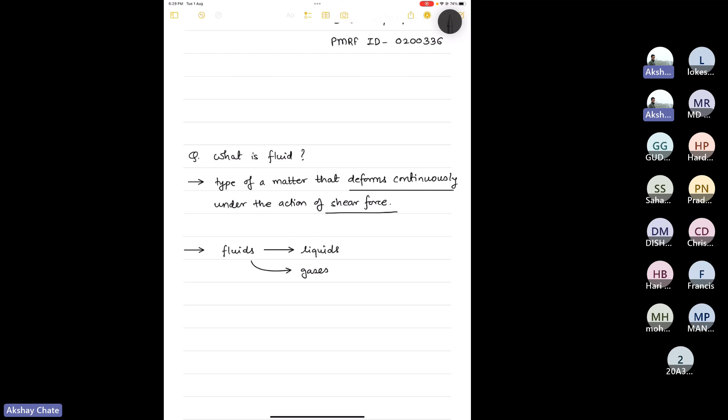So basic is like fluid and fluid mechanics is out of the way. Can you write down the definitions a little bit? It's written here, right - type of matter that deforms continuously. Okay, I can write it down, but it's not a textbook definition. It's okay, not a big deal.

What is fluid mechanics? Branch of science that deals primarily with deformation of fluids under the action of external forces and their consequences. So this is a condensed version of it, but this captures the essence of this course.

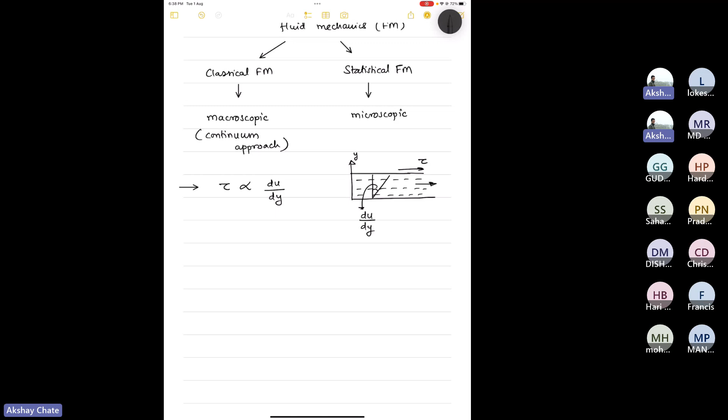I'm assuming you might have seen this pictorial representation of this law of viscosity. So basically, fluid is flowing in this direction, and this is our y direction. As it is a shear force, it will be applied on the surface or the interface that will deform the fluid, and so this angle essentially is the rate of deformation of fluid, and then there is a constant of proportionality, which is nothing but the viscosity.

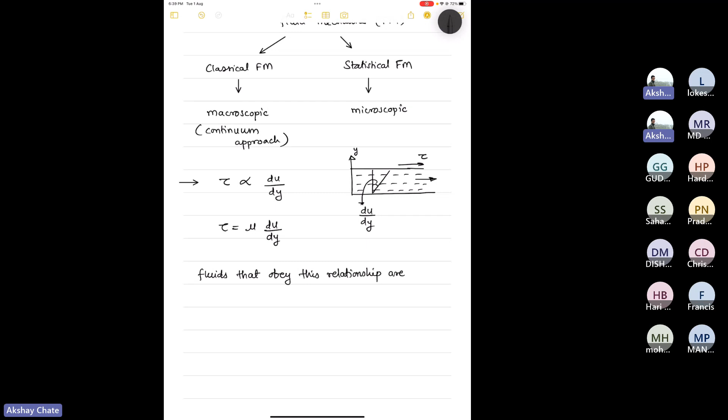And this is true for, like, there are some fluids which obey this law, and there are some fluids which don't obey this law. So the fluids that obey this law are called Newtonian fluids.

Okay, so then as the name suggests, if some fluids are Newtonian fluids, then there will be some fluids which...

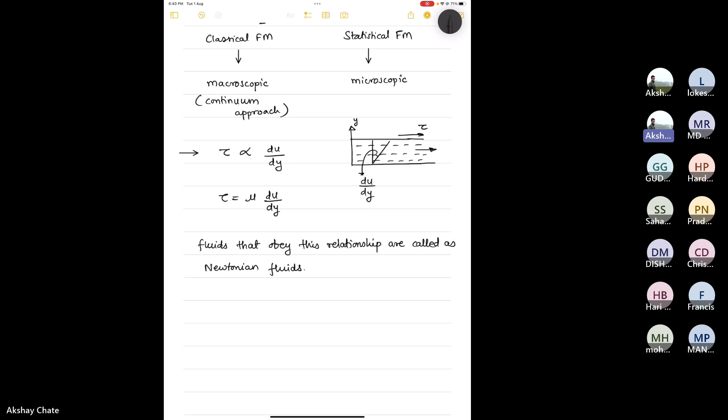You are not audible, sir. Am I audible now? Yes, sir. Oh, I don't know what happened. I was audible, I think, initially. Anyway, so yeah.

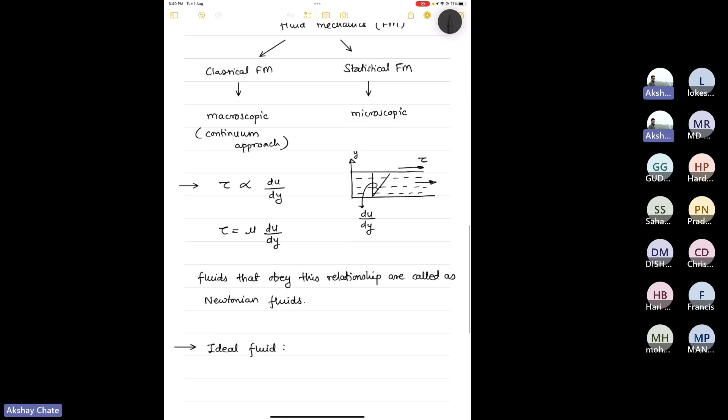Then there is something called ideal fluid, which does not exist in reality, but it is an idealization of a fluid in some hypothetical context. You should only remember two things about ideal fluid. It has zero viscosity, and I think that is the most important thing of it. And I think it is incompressible. It is considered incompressible as well. But this is not a real fluid. So as long as you just remember the concept that there is something called ideal fluid which has zero viscosity, it's fine. I think that is okay.

And then there is another type of... one second. Sorry.

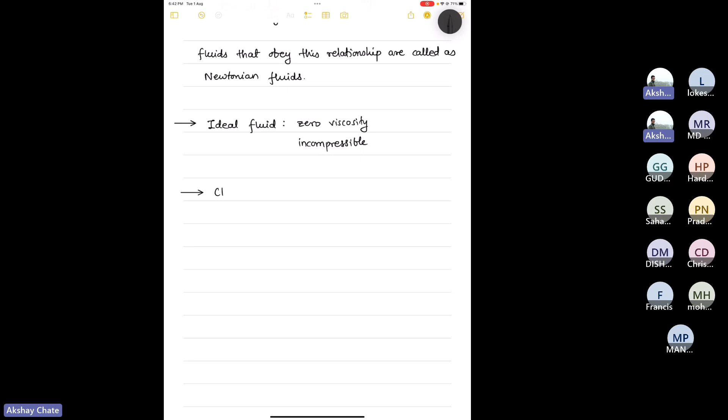But sir, we learned any fluid has viscosity. We learned that somebody told us. Yeah, any real fluid has viscosity, however low it can be. But this ideal fluid does not exist in practice, in reality. So I am telling you this because you might see it as an option in some of your questions or in some competitive exams. Ideal gas, typically we discuss that in thermodynamics. So in reality, nothing is ideal. So in context of fluid mechanics, you can define ideal fluid which will have zero viscosity and it will be incompressible. I think there are some additional properties to it, but it does not exist in real life, and therefore we don't study it in this course also, but it is there. I am just introducing the terminology. It's not a real thing, so don't get carried away too much on this. In real fluids there will be some viscosity and there will be some additional change in behavior also, which we'll discuss now. So I will just call this classification of fluids.

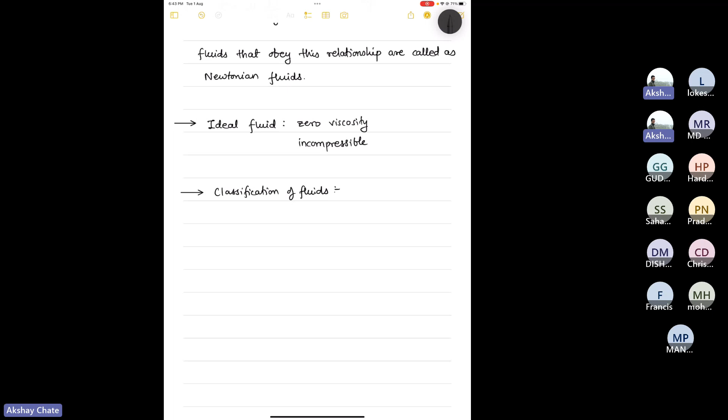And there is one very famous diagram. One second, I'll just pull it up.

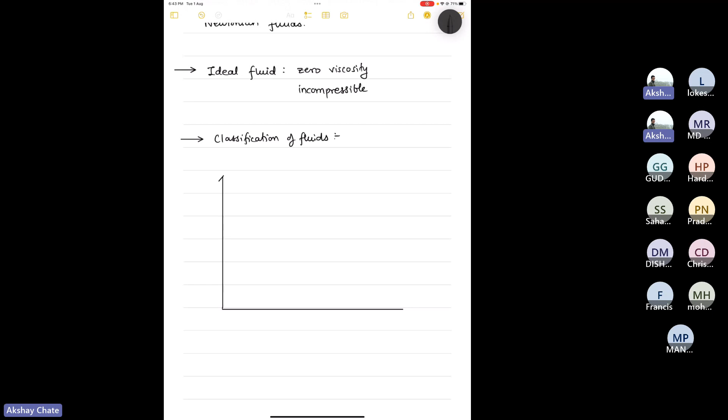So on the y-axis you have shear stress, and on the x-axis you have this velocity gradient or rate of deformation of the fluid. Newtonian fluid is typically a fluid which shows... okay one second. So this is the origin. So this is Newtonian fluid.

Because here your tau is directly proportional to the gradient, you get a straight line. It will have some slope, which is your viscosity.

Then there are some fluids which don't show this type of behavior. They show slightly different variation, like this curved line. You will not get a linear relation, but something like this. Here your shear stress is increasing with respect to the du/dy velocity gradient, but it's not a linear relationship. Initially the deformation is more - you apply a small load and it deforms, but after a certain time, if you want to deform it further, you need to apply more load. So that is the relationship between tau and du/dy. These type of fluids are called dilatant.

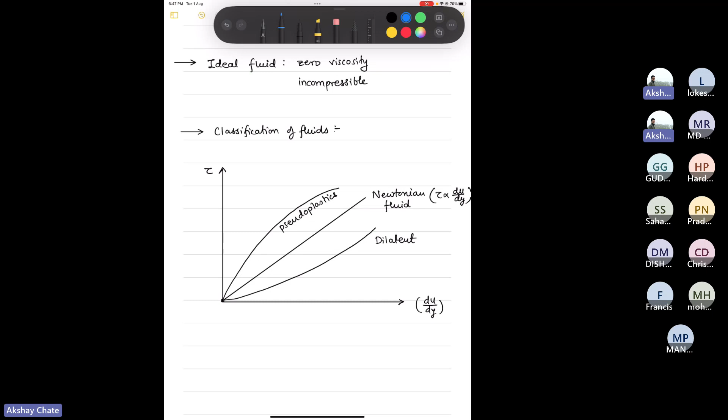Then there is another type of fluid called like plastics. As soon as you apply the force, they won't deform. For some time they behave like a solid, with no deformation under shear stress. But after a certain time, they start deforming, and that is how you get the rate of deformation. So they will typically look like this. There is some initial tau 0 that you need to apply, and only after that will you see some deformation that is visible.

So when they show this linear variation after that initial tau 0, they are called Bingham plastic. I will write it here.

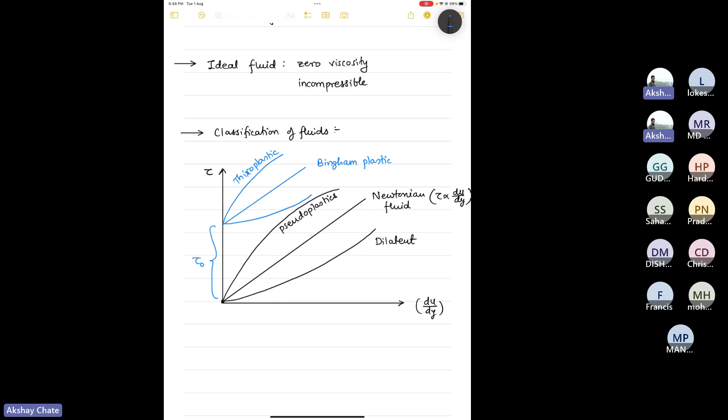And then there are also some fluids which, after initial application of tau 0, when they start to deform, don't deform linearly. They deform something like this as well as something like this. So as in the case of Newtonian, pseudoplastic, dilatant, there are 3 types also with Bingham plastic. The other 2 types are called thixoplastic, and I think this is rheopectic or rheoplastic, something like that. You can cross reference the names that I'm putting here, but you get the idea, right?

It's not like every fluid, as soon as you apply the shear force, starts deforming. It doesn't work that way.

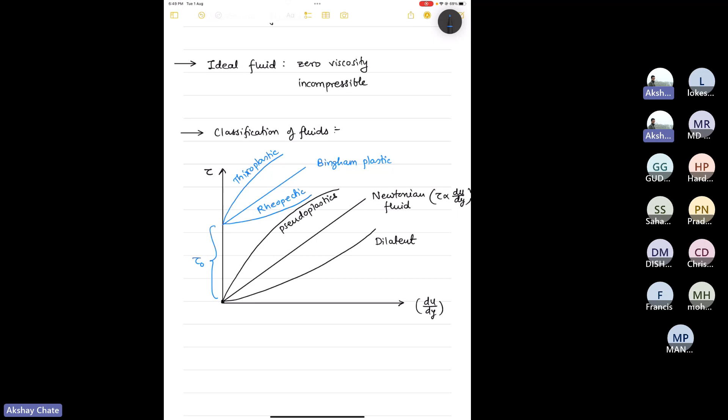And this velocity gradient is called strain rate also. So keep in mind this velocity gradient... oh this is not right, sorry. Yeah, this is thixotropic, and this is rheopectic, okay.

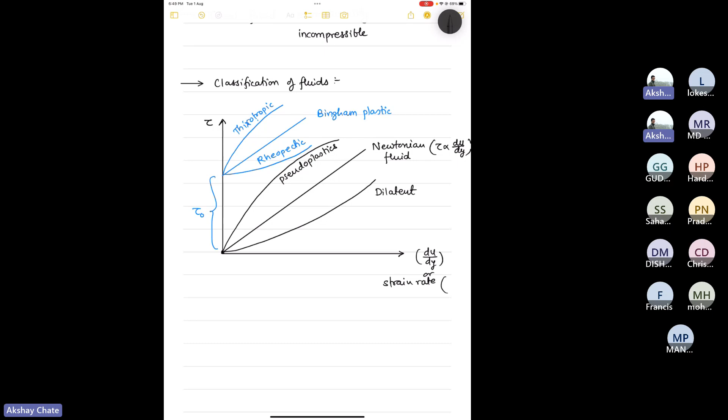Just to clarify, sometimes on the x-axis, instead of du/dy, you may get strain rate. In some books you may see this. So basically, strain rate is this deformation with respect to time. If you do some geometrical manipulation in this figure, you get that the velocity gradient is equal to the strain rate.

So that is there. Coming back to this diagram, I have one question. This is called tau 0, the yield shear stress. You may not need to remember this or mug up these things, but you should at least have some feeling as to what we are talking about.

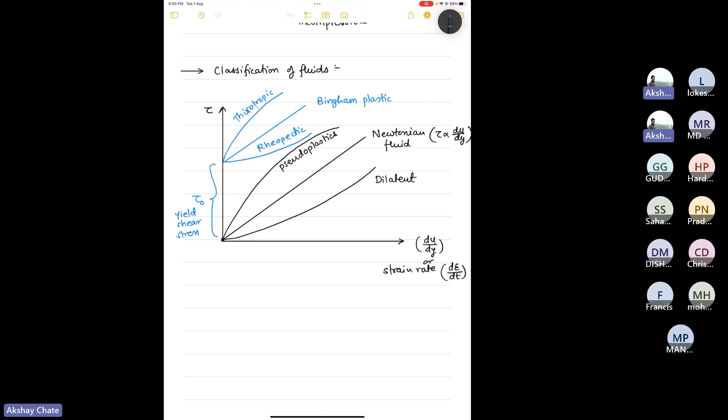So my question to you is, as I said, there is something called a hypothetical fluid called ideal fluid, and then there are some solids. So on this figure, where we have tau on y-axis and velocity gradient or strain rate on x-axis, where will the ideal fluid lie? Or if I want to show the ideal fluid line, where will it be? Can anybody answer this question? First of all, did you understand the question?

So it does not lie anywhere. Okay, so somebody said it does not. Pradeep, I think. Yeah, Pradeep said it does not lie anywhere. Anybody else? Can you repeat the question?

Okay, so here you see 6 types of fluids: Newtonian, dilatant, Bingham plastic, etc. My question to you is, if I want to show an ideal fluid on this plot, what will be the relationship between tau versus du by dy for an ideal fluid? Keep in mind, ideal fluid does not have any viscosity. It is a hypothetical fluid with zero viscosity.

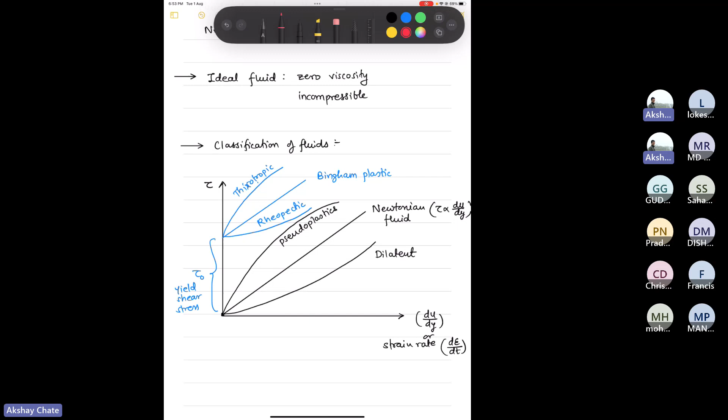Yeah, so you are going in the right direction, but see, if any fluid does not have any viscosity, even if I apply very small shear stress, it will keep on deforming, right? Because there is literally no viscosity. So therefore, in a limiting sense, it will have infinite strain rate or velocity gradient with very small tau. So that line should be something like a horizontal line, close to origin, but there should be some non-zero tau, right?

Like that, you can apply any tau to the ideal fluid, it will keep on deforming because it does not have viscosity. So the deformation is literally independent of whatever tau you apply, but typically for very small tau, it will start deforming very high. So that is ideal fluid.

These type of MCQs are generally asked in some competitive exams, maybe in GATE exams or something like that. But yeah, so the next important part of this discussion is examples of these type of fluids.

In this course, one question - when you say ideal fluid is incompressible, means it cannot be compressed, does that mean it cannot be deformed? No. Incompressibility comes in the context of normal force. In the case of shear force, it doesn't matter whether it's compressible or not, it will deform. When you say it is incompressible, that means when you apply normal force to it, it won't budge.

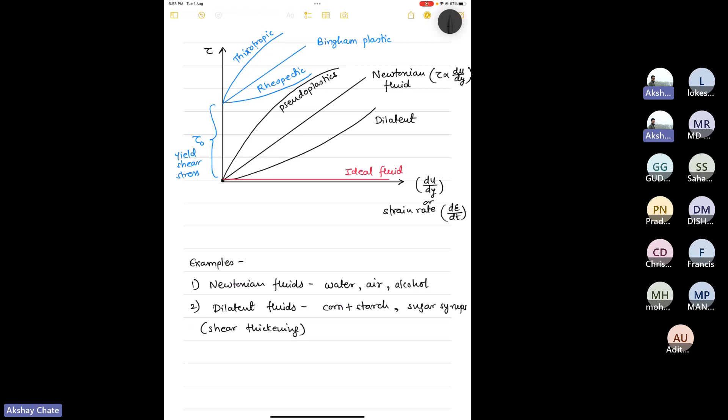Then there is Newtonian, dilatant, then pseudoplastic. These dilatants are also called shear thickening - this is just a term you should be aware of. What happens is, as the diagram suggests, when you apply more and more shear force, the velocity gradient or strain rate becomes less and less. So basically it is said that it thickens with application of more stress.

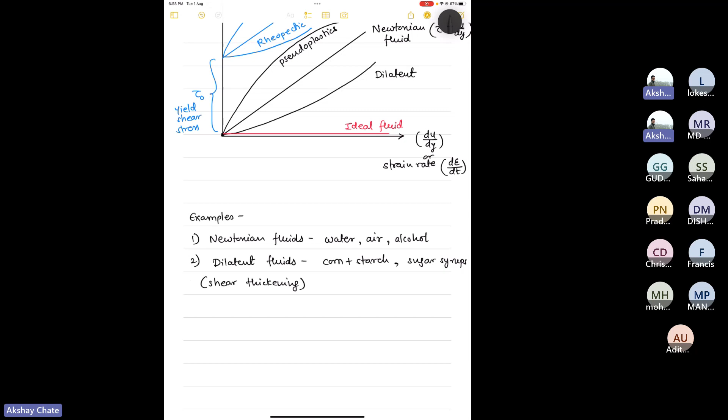So therefore they are called shear thickening fluids, and the pseudoplastics are called shear thinning. Basically, with the application of more and more shear force, they keep on becoming easier to flow - their resistance to flow, which is viscosity or the velocity gradient, decreases.

So like that. Don't get confused, or if you are not interested, don't pay too much attention to this topic. But my point is, these terms you should at least be aware of, if you're going to say you study fluid mechanics.

The most important example is blood. You might have heard that when you do a blood test they use this thing, but not directly, so leave that aside. Blood is there, and I think paint also comes in this, nail polish paint.

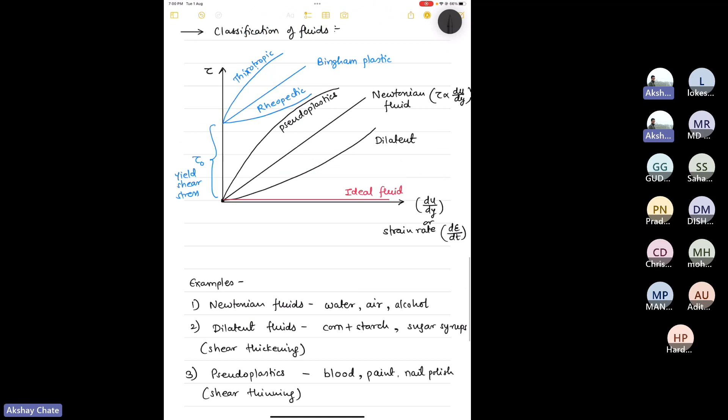So Bingham plastic etc., we can discuss. I think Bingham plastic is toothpaste. As far as I remember, the most important Bingham plastic example is toothpaste, and I think it was asked in the GATE exam also.

Yeah, toothpaste and mayo, that mayo sauce that we eat. And what else is remaining? Rheopectic. These are very special types of fluids, not easily observed. I'm just giving you some examples, but they're not that important, I think. This rheopectic, I'm not finding an example either.

Yeah, so there is one example for rheopectic, which is, I think, gypsum suspension in water, something like that. Initially it won't budge, but after a point it will start deforming, and then it will become harder and harder with the application of more shear stress.

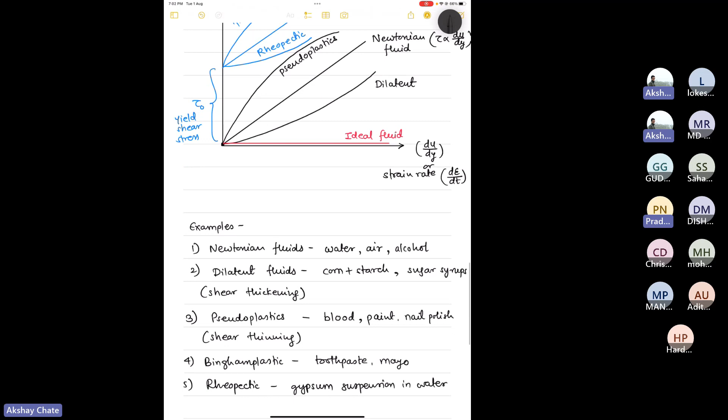And for thixotropic, I think the important one is lipstick, something like that is important for it, because these type of very small questions will be asked in your competitive exams. In this course, maybe not much, but you should at least know what is what. So thixotropic, I am not even finding good examples for it.

Anyway, rubber, sir, rubber. Rubber, huh? Are you sure? Yeah, rubber. Okay, yeah, we'll put it.

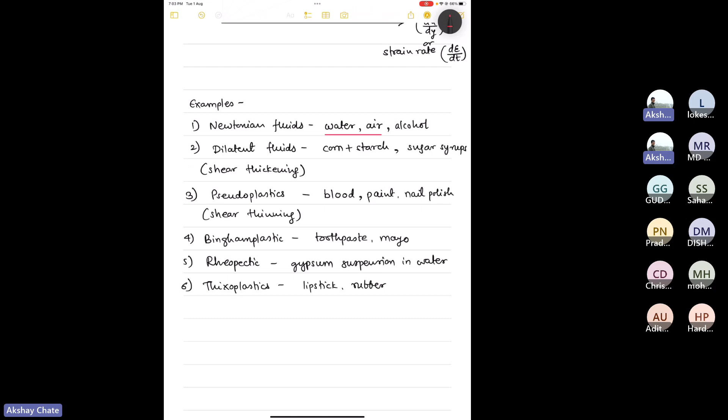So it is my sincere request to all of you attending this lecture: I have given these examples, and there will be some more examples, so if you're interested, please cross-check this. The key takeaway from all this discussion is that the most important fluids we are going to study are water and air, and they are Newtonian fluids. Therefore, for Newtonian fluids, we typically use this relation to solve problems later on. This is the whole conclusion. We've spent some 5-10 minutes on it, but it's good that you know other things also.

Let me check this. I think in your assignment there are some questions on this topic, and I think you can answer this. This ideal fluid is in your assignment question, so maybe you can answer it. I think I have given you the answer directly, but anyway.

One second. Now next, what should we discuss? This is actually an introductory class, right? So I think surface tension, capillary, and what else is there, I think those should also be covered in this one. Let me just confirm this.

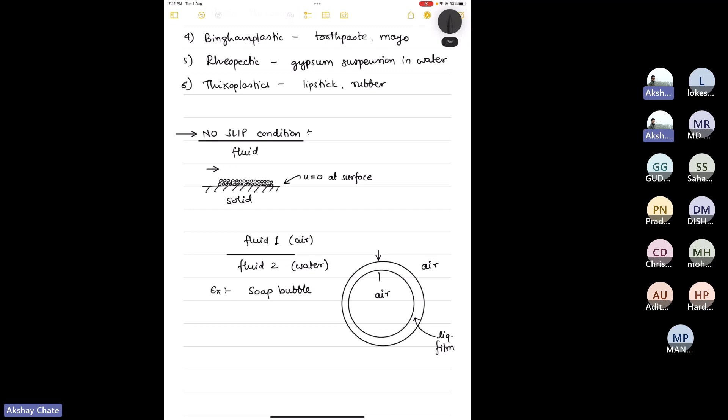So here, what happens? In solids, solids have stronger intermolecular attraction forces, therefore they don't deform easily when fluid flows on top of them, and the first layer of fluid sticks to it. But in case where there are fluids on both sides, both fluids will deform, right? So on this outer interface as well as on this inner interface, you cannot apply the no-slip boundary condition.

And then there is something called the slip boundary condition. There, basically, you don't take velocity as zero at that interface. And there is one more example where no-slip boundary condition doesn't apply.

It is, as I said earlier, in microfluidics. Channels there fall under the continuum or classical fluid mechanics domain only, but they are very small. Let's say a normal pipe is of the order of centimeters, millimeters, right? But if I construct an artery wall for a human heart, it will be of the order of a few hundred microns or something like that.

So that still falls under the category of classical fluid mechanics, but the length scales are very small. So sometimes the no-slip boundary condition does not apply because there are other forces at that very small diameter or length scale that become dominant over the intermolecular forces. So there also the no-slip boundary condition is not strictly followed. If some of you are interested in higher studies, keep in mind that this also happens.

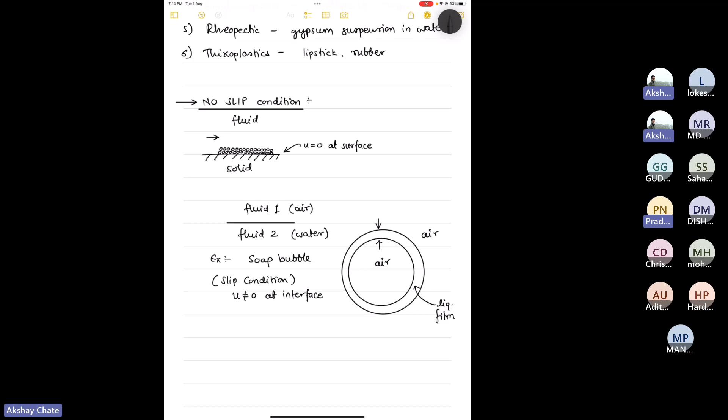Then, what else is there? In case of turbulent flow, also no-slip boundary condition issues occur. Turbulent flow, yes, very good question. So if you see turbulent flow...

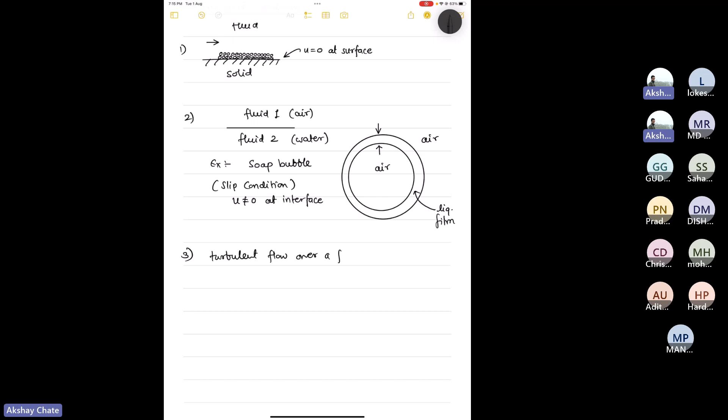Maybe I'll draw it here only. So this was the first case, this was the second case. Let's take the turbulent flow as the third case, we'll consider turbulent flow over a flat surface, just for our understanding. So what happens if you zoom in, let's say this is the solid surface at the bottom.

If you just observe it, in turbulent flow, the velocity vectors of fluid particles keep changing as per their location as well as their time. So there will be some eddy or vortices also. Turbulent flow is a very difficult fluid phenomena to study analytically using equations and all.

It's very difficult. But if you zoom in on this interface, what is observed is, I'll use a different color. Very close to the surface, there is a very small layer which is called as viscous sublayer.

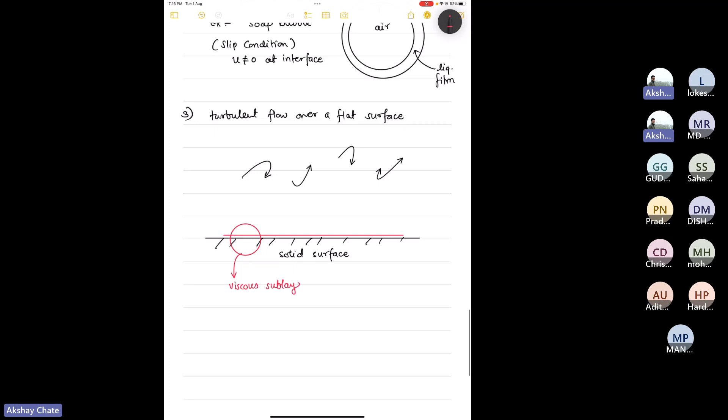If you zoom in, this is again the interface, solid interface. But in this region, there is similar behavior as the laminar flow. So there will be orderly motion between the fluid particles, and the first layer of fluid particles will stick to the surface, and then typically what is the laminar flow, orderly fashion flow will take place.

So even in case of turbulent flow, no slip boundary condition is applicable. The difference between laminar flow and turbulent flow comes after this viscous sublayer. So basically, very close to the surface, there will be viscous sublayer. Then there will be something called as buffer layer. And then there will be your turbulent flow.

So there is a dedicated field of fluid mechanics which deals with turbulent flow and how they develop. And as you asked, that is a very good question. In case of turbulent flows also, this no slip boundary condition is valid.

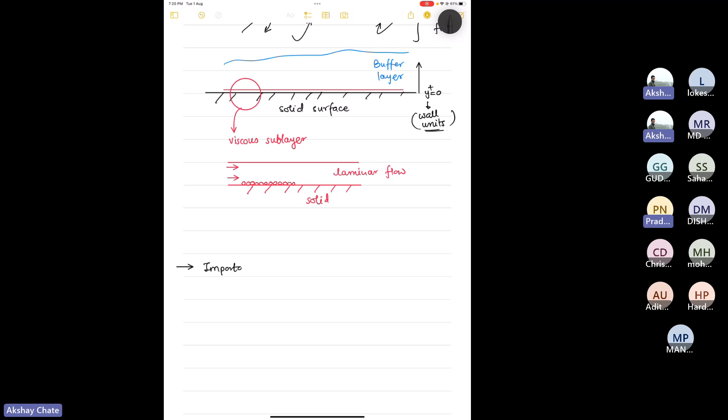There are some important numbers that we need to understand. First is called as the famous Rayleigh number.

So, can anybody tell me the formula for Rayleigh number? Anyone? First of all, have you heard this Rayleigh number exists? Yes, I did. Really, okay good. Then can anybody tell me how do you define Rayleigh? Or is it not covered yet? I think maybe it's not covered yet, but just let me check the notes if it is there or not. If not, I'll just leave this topic to discuss in the future. Okay, I think it is not discussed, so let's skip it for now. Maybe next time we'll come back to it. You can just tell us, just 1 or 2 sentences. Pardon? You can just tell something. Since you mentioned this, kindly 1 or 2 sentences, you can just mention what is this actually. Okay, yeah, I'll let you know. See, what happens? How should I say this thing. Let's say.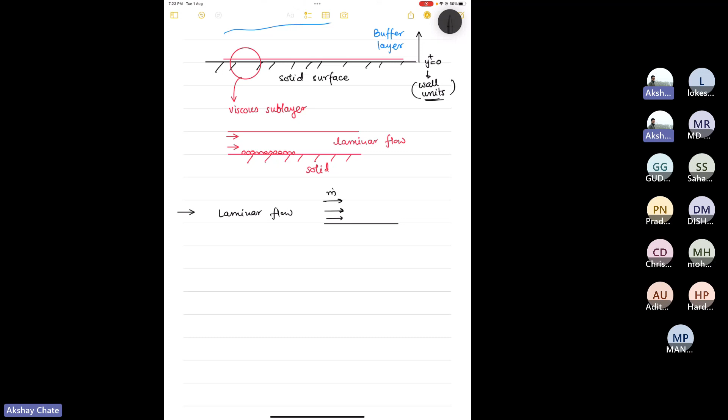In case of laminar flow, let's say you have some mass flow rate of the fluid, and then you increase it, you keep on increasing it. After a certain mass flow rate or velocity of the flow, it becomes turbulent. Turbulent flow is nothing but disorderly motion of the fluid particles. You will not observe linear or smooth motion. There will be abrupt motion, and the particles will have different sizes, etc.

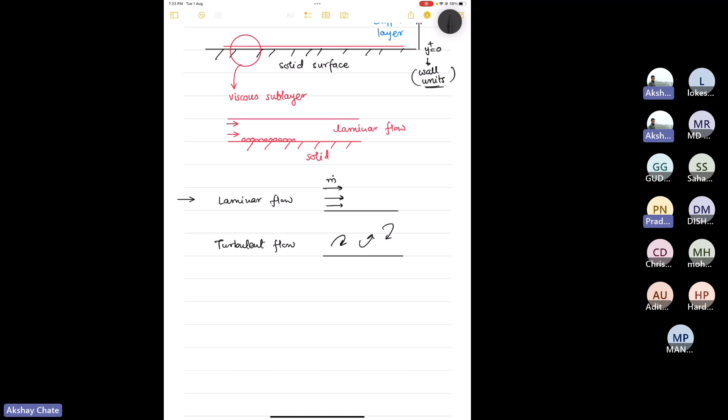There is a transition point, let's say if you are considering a flat surface. If your Reynolds number is less than 1 lakh, it is considered laminar, and if it is greater than 1 lakh, or maybe 5 lakhs - let me confirm - I think it is 5 lakhs, for a flat plate. But this number doesn't matter per se, it is actually varying, somewhere on the order of 1 lakh. Beyond that it becomes turbulent.

And for pipe flow, it is different. But my point is, this is not the significance of Reynolds number. Reynolds number is typically defined, for this example, as rho v L by mu. So rho is the density, v is the average flow velocity, L is the length of the flat plate, and mu is the viscosity of the fluid. This is the formula for it.

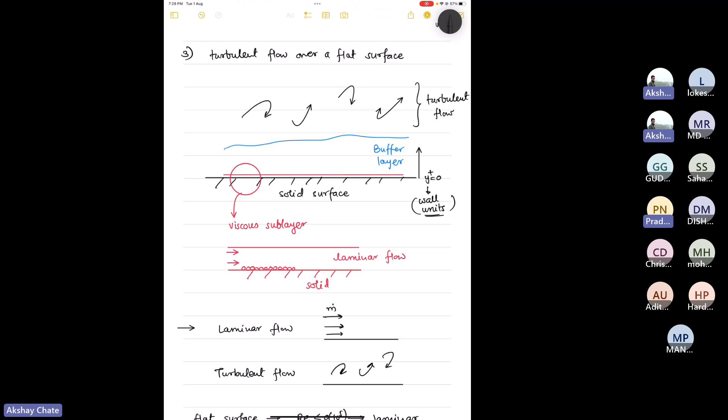So Reynolds number, if anybody asks you in a technical interview - and this is actually a very typical question - don't just say it is rho v d by mu or rho v L by mu. Give a technical answer like: Reynolds number is the dimensionless number which determines whether inertia forces are dominant or the viscous forces are dominant for fluid flow. There are different numbers, we will discuss them later, I think in the boundary layer topic it is there, so we'll discuss more there, but this is the main crux of it.

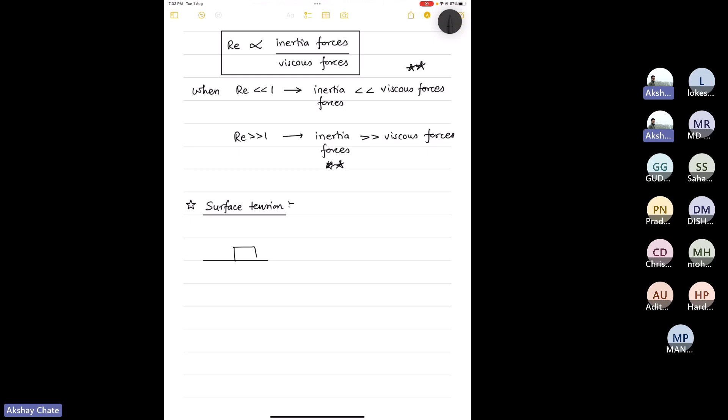If I remove the surface part and just ask what is tension in a string or something like that, it is like when you apply force on its end, and the force should be in an outward direction. Like for example, this is the typical example that we study in 11th, 12th, right? So there will be some mass, there will be some massless string attached to a pulley, and there will be some another mass. It's a very common problem in JEE and all.

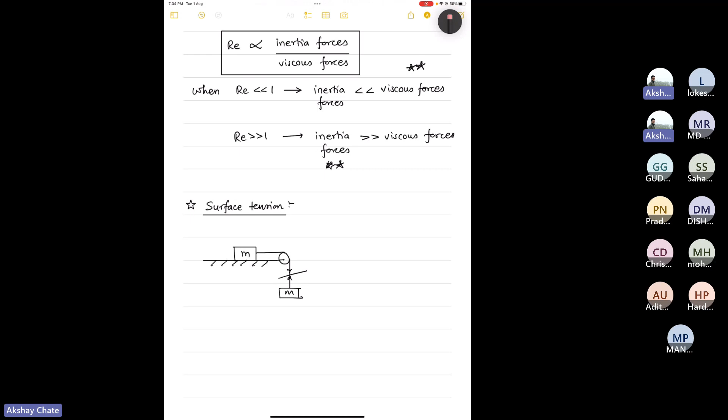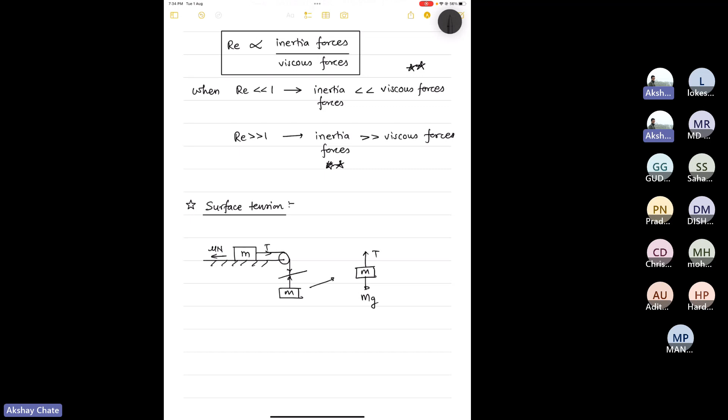So here, when you draw the free body diagram of this string, you say there is a tension between this. If I draw the free body diagram of this mass, it will look something like: there will be tension, and its own weight will be balancing the tension in the string, right? The point I'm trying to make is, for this other mass, it will be mu into its normal reaction, and that will be balancing the tension in the string. So tension is always acting outwards.

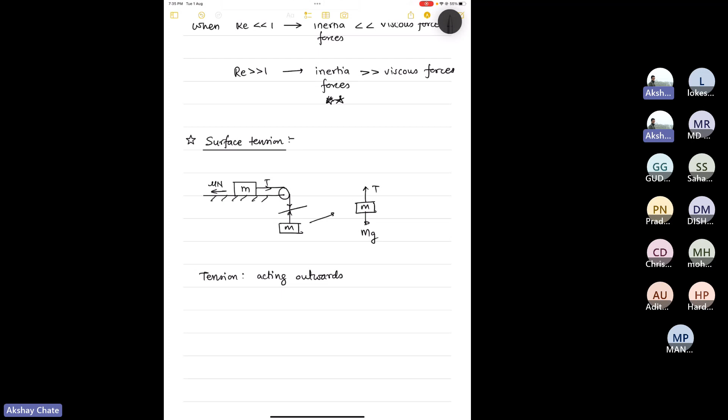So let's say you have a fluid surface, and when you apply a tangential force to it - for example, this is the fluid surface, okay, and you are seeing it from the top view, like that. And if I apply some tension force, like if I am stretching it, then after some time it will deform. Let's say it deforms in one direction and becomes like this, okay.

So if its length is increasing, its width will decrease, right? So the amount of energy that I put to stretch this fluid surface or film, divided by the area of the film, is called the surface tension. So basically, it is energy spent in stretching the fluid film.

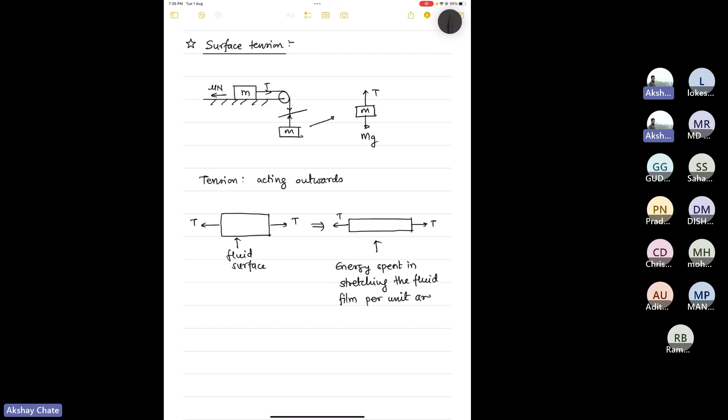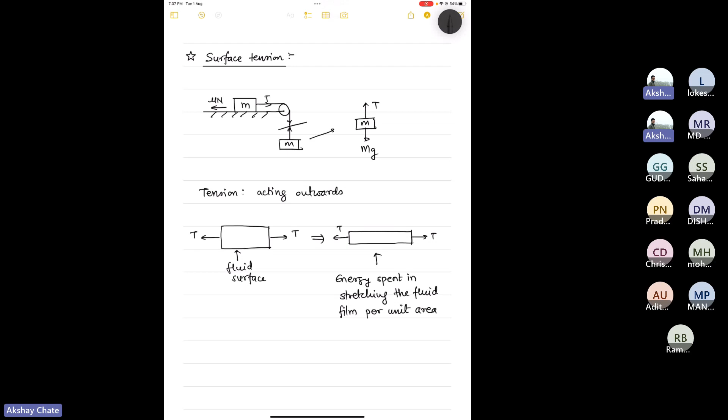Per unit area. So typically when people ask what is surface tension, or maybe if somebody asks you, you should explain it this way: it is the quantity that defines how much energy needs to be spent in stretching that fluid film per unit area. So that's why if you see, the units of surface tension are - can anybody tell me what is the unit of surface tension in standard units? It is typically Newton per meter.

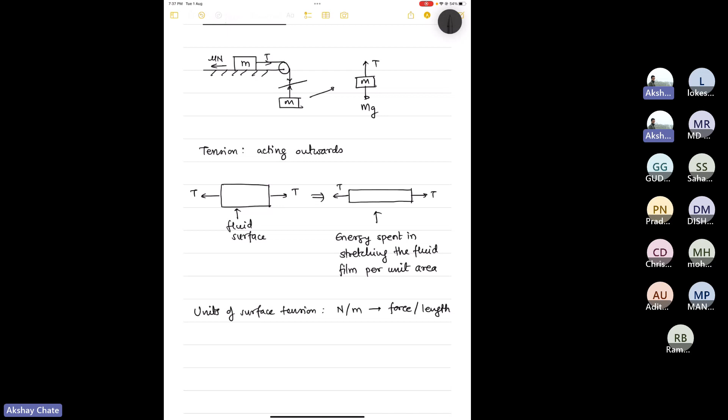So what we think is, it is basically force per unit length, and many people define it that way: when you apply a force on a surface and it stretches by some length, the force applied per unit length is called surface tension. But that is not the correct way. It is actually the energy, in joules, per area of that film which you are stretching. So eventually this joule is defined as Newton meter, which is why it becomes Newton per meter. But it is better to define it in the form of surface energy.

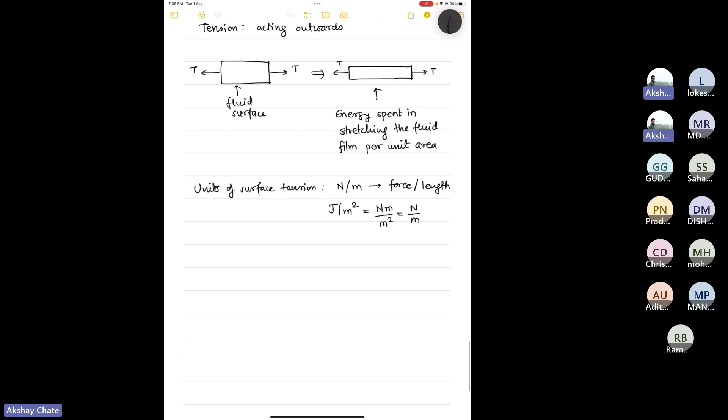And apart from that, so now there is this derivation of it. So let's say we take a - it should be circular, sorry.

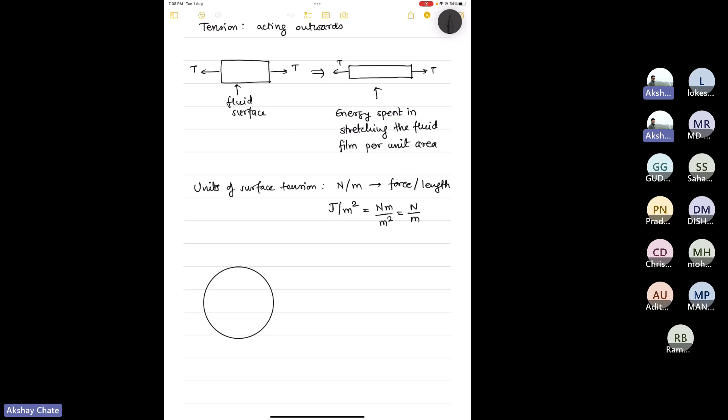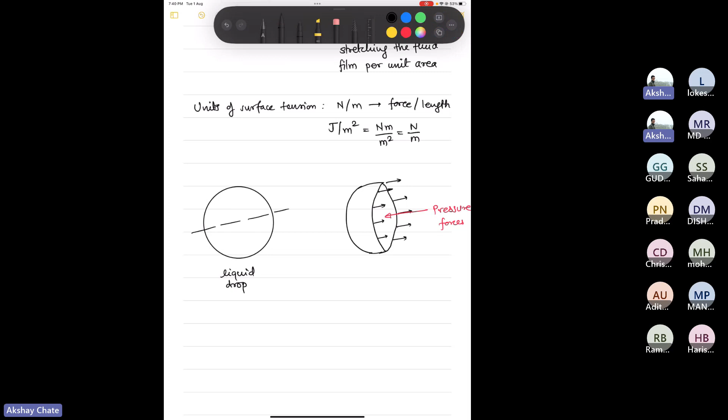Yeah, so let's say it's a liquid drop, and now again the question is, you need to find how much energy was utilized to form this drop, and surface tension is basically the resultant of that energy per unit area covered. So here, generally, what they do is take a cross-sectional area like that, and you will see a diagram like a semicircle, drawn this way, and they show on the circumference the surface tension forces, and at the center there will be pressure forces, or let's say pressure force, and on the surface you have surface tension force.

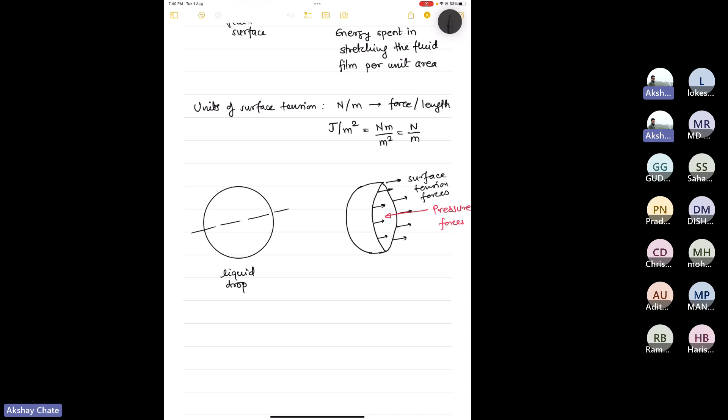Actually, when I first studied this, I did not understand it. Why did they divide the drop into half, and what did they do? So basically, it comes from here.

So here also, what you did was cut the string and do the free body diagram, and then realize tension equals mg, or in the horizontal case, tension equals mu n. In the same way, they divide the liquid drop into two parts, and when they draw the free body diagram, what is observed is this: inside the liquid drop, the pressure is higher, and that's why it tries to bulge the liquid. So these pressure forces are there, and surface tension forces keep them in check, so that the liquid interface is stable. If these two forces don't balance each other, the drop will dissociate or break down into a number of smaller droplets, where the surface tension forces will be balanced by the pressure forces. So that's how it goes.

Sir, please can you share MI links? I don't know what is MI links.

Anyway, coming back to this, the derivation is straightforward. For a stable liquid-air interface, the surface tension forces should balance the pressure forces, right? So the surface tension acts on this area, but it is taken on the periphery.

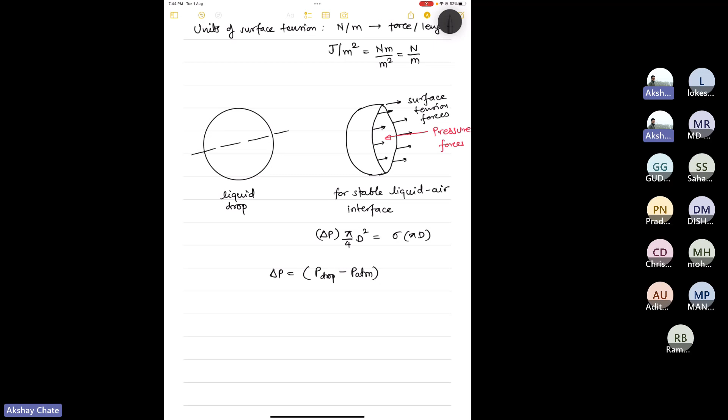So now, I have written it in a different way. Typically, at a given temperature, the surface tension between any surface interface is a fixed value. This sigma, for example, if you take a bubble or drop in air, for water and air interface, this sigma value is defined. So typically we use this force balance to find the pressure inside the bubble, or this delta P, which is liquid drop pressure minus atmospheric pressure, that is delta P, and that becomes equal to 4 sigma by D.

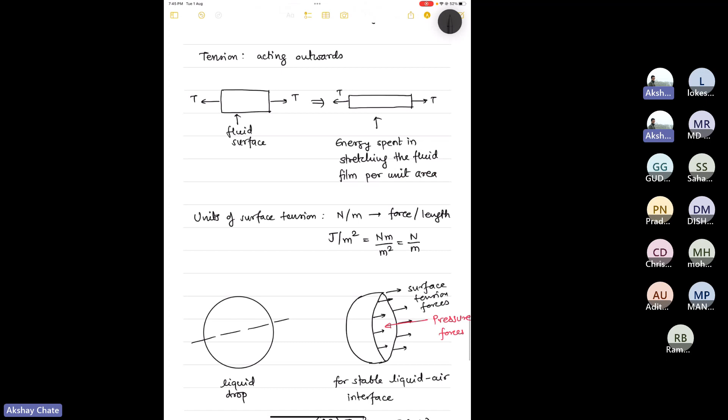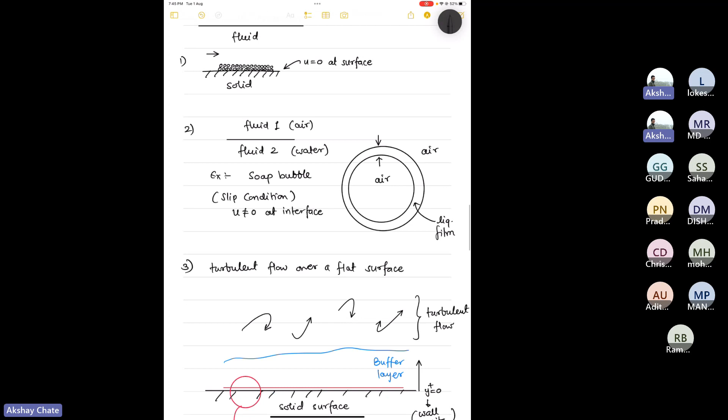And if it is a liquid bubble, what happens is, instead of one outer surface, there are two surfaces. One outer surface between air and the liquid film, and one surface between air and the liquid film from the inside. So the surface tension effect becomes twice, and therefore delta P becomes 2 into 4 sigma by D, which is 8 sigma by D. So if you understand this derivation, I think more important than the derivation is the physical significance you should take away from here.

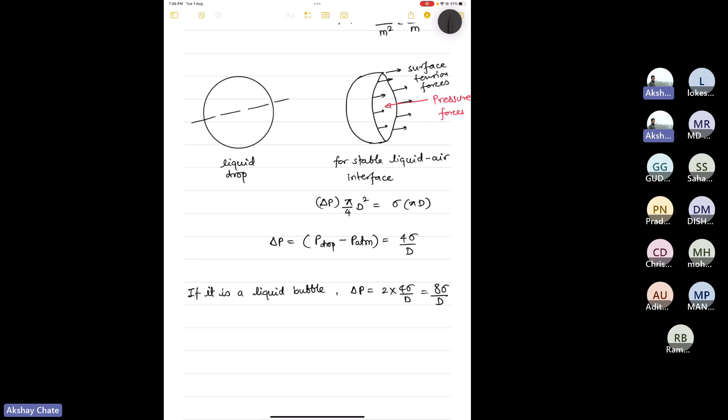So that is there. What else is there? Capillary action is remaining. Maybe we can discuss it, but capillary action also, more or less, you know. And one more thing is there. I think this question was asked to me also previously. What should I say?

You can take it as a note that surface tension arises due to unbalanced cohesive and adhesive forces. So basically, cohesive means same molecules, and adhesive means different molecules. It is given in your notes also, but this question is very important, and I think in many competitive exams it has been asked. So surface tension, why does it occur? It occurs because at the interface, I should write 'at interface'.

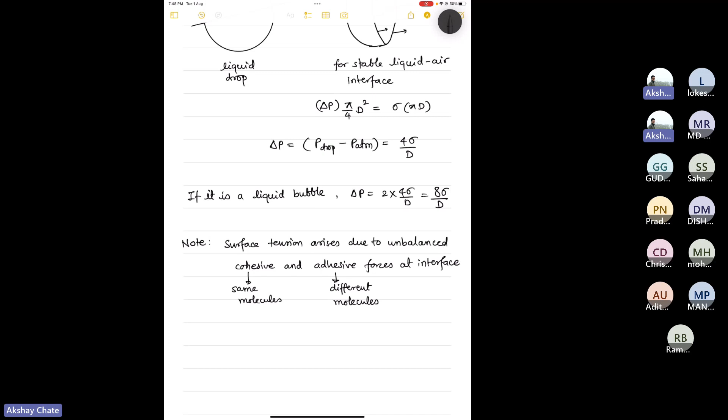At the interface, what happens? There is a force imbalance. Let's say you consider a particle at the interface, with air on top and water at the bottom. So for a molecule on the surface, there is air above and liquid water below. There's a difference between liquid-air interaction and liquid-water interaction for that molecule, and because of this force imbalance, surface tension exists.

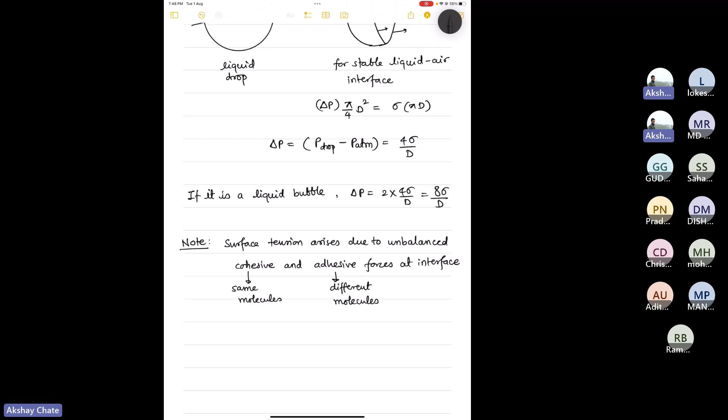So this is also a very important note, please remember this. And then there is capillary derivation also, but I think it's available anywhere. But one more concept I'll briefly discuss, and we'll stop for today.

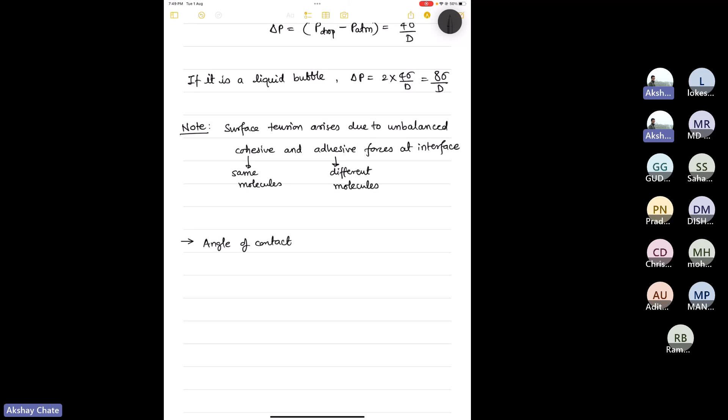It is called angle of contact. This also comes into existence because of the difference of surface tension between different types of surfaces. So there will be something like this: a solid surface, a liquid, and air, or maybe not air, let's say any gas.

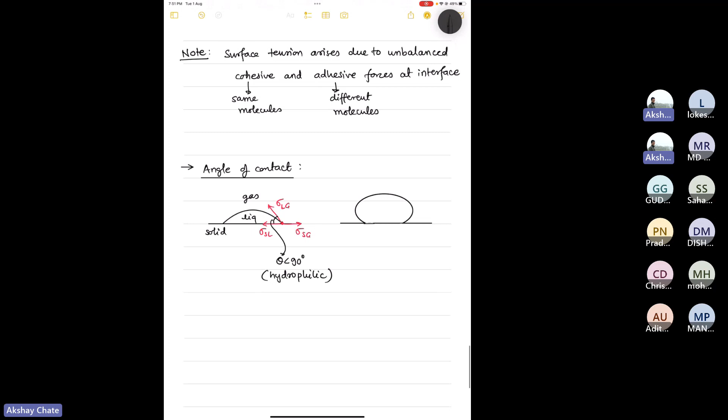So here, because of interaction between solid, liquid, and gas, the droplet will not completely stick to the solid surface. It will float on top of it, and this is very interesting. We generally don't observe this in practice, but it happens, and that is also important.

Here your theta is greater than 90 degrees, so I think these surfaces are called hydrophobic. But don't worry about hydrophilic or hydrophobic, that is not important right now.

But there is this angle of contact, and one important question typically asked in exams is its definition. I can trick you by saying draw any liquid and solid interface, show me the surface tension direction, and draw the angle of contact. One thing you should know is the angle of contact is always drawn passing through the liquid side, not the other side. So in this figure, the angle of contact will always be like this, in the case of hydrophobic, not the other way around. That would be the wrong direction. That is the only trick that can be asked.

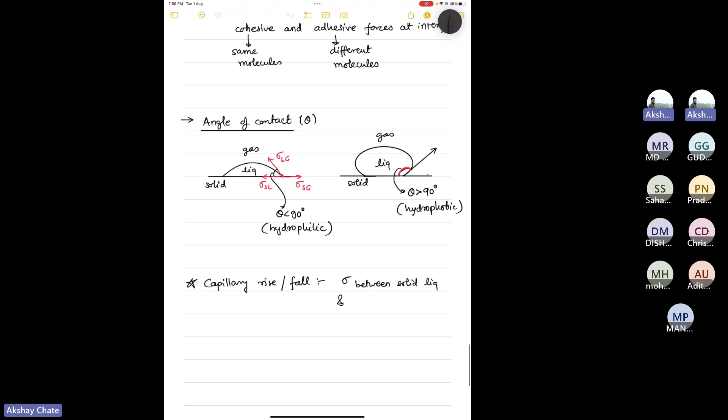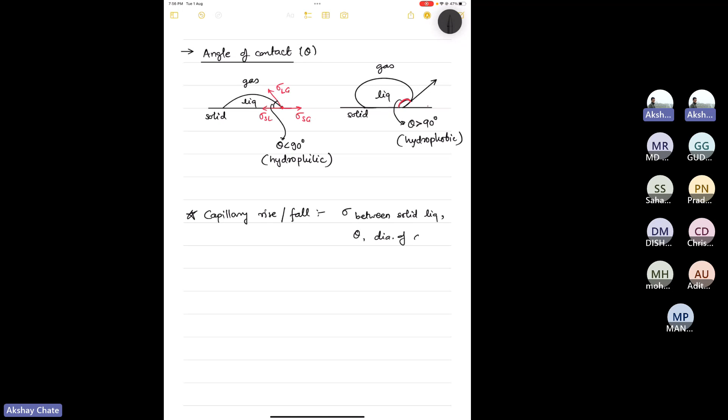And this angle of contact, let's call it theta. So this theta, and also if you see the derivation, the diameter of the capillary tube matters. One second, I'll just do the derivation, you will realize what I mean. Let me quickly do it because it's a standard derivation.

Oh, it doesn't do that. I thought it would make it as a beaker.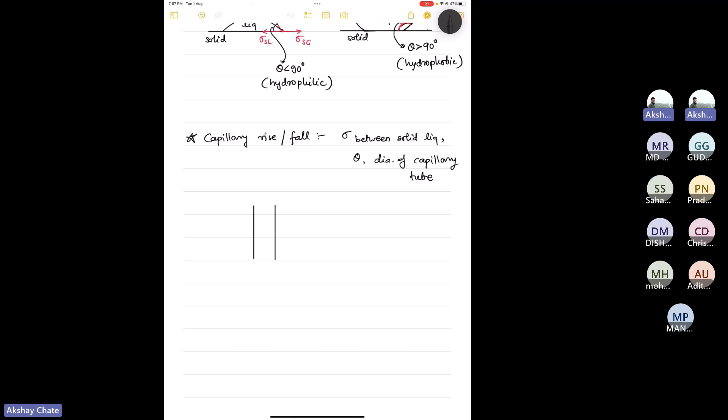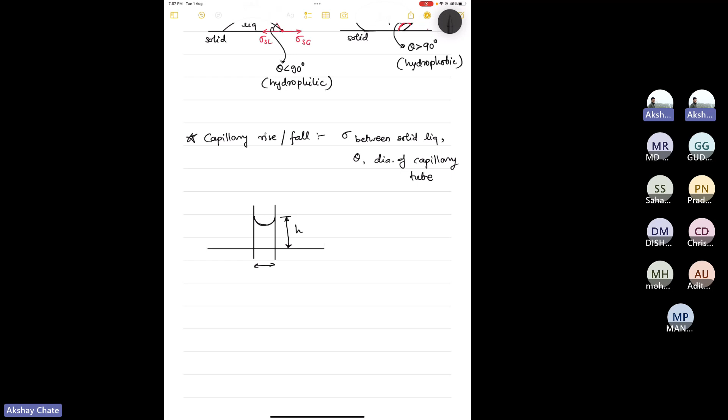Let's say this is your liquid surface. Taking water and glass as the material of the tube, with water inside, it will show this behavior, and your water level will be somewhere here. This height is the capillary rise, this is the capillary tube diameter, and this is the liquid we are considering: water.

So what happens here: if you resolve the surface tension forces, they act tangent to the liquid-solid interface. And there's the weight of this liquid column in the capillary rise.

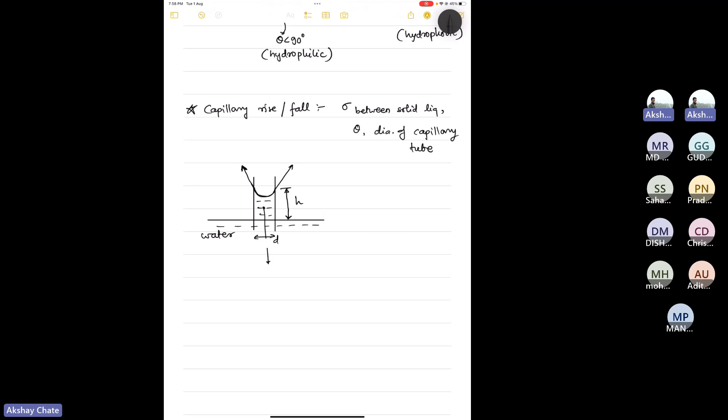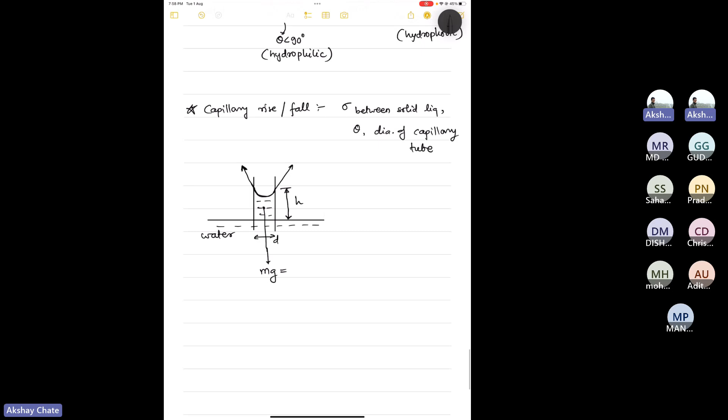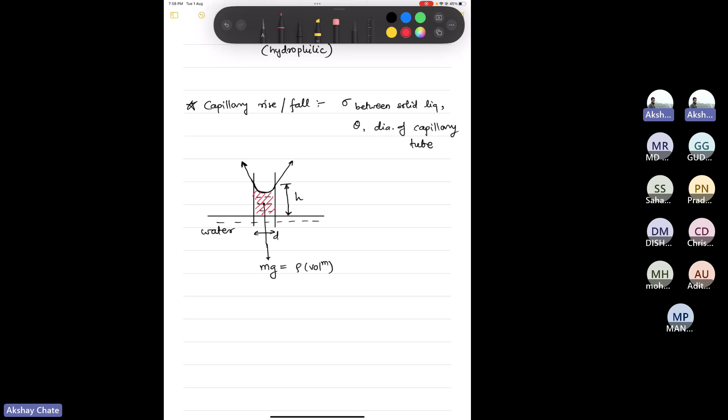This weight will be mass into gravity, g. Mass here will be density into the volume of this part, let me shade it, into g. Volume will be considered as a cylinder, so pi d squared into h. So this is the total force acting downward.

On the top side, we need to resolve the tension force in this direction so that it balances the weight of this thing. So if it's a tension force in this direction, we take the cos component of it in the circumferential direction.

From the top view, if you see, it is a circle. So the tension force acting on that periphery gives you the total surface tension force: T cos theta, which is the normal force of the surface tension force, into pi d.

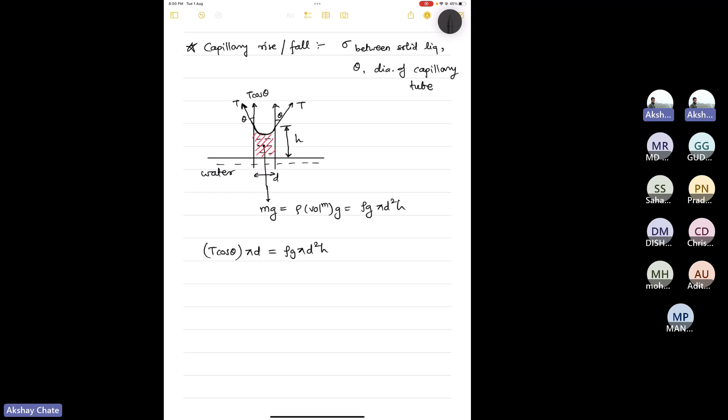So this gives force, and here rho g pi d squared into h, balancing the force here. So pi cancels and one d cancels. Am I missing something? No, right? One second... okay, yeah, I think this is the correct way.

Typically our interest is how much height it rises, so it becomes h equals T cos theta divided by rho g d. As I said, this capillary rise or capillary fall is primarily a function of surface tension, theta which is the angle of contact, the density, and the diameter of the capillary tube.

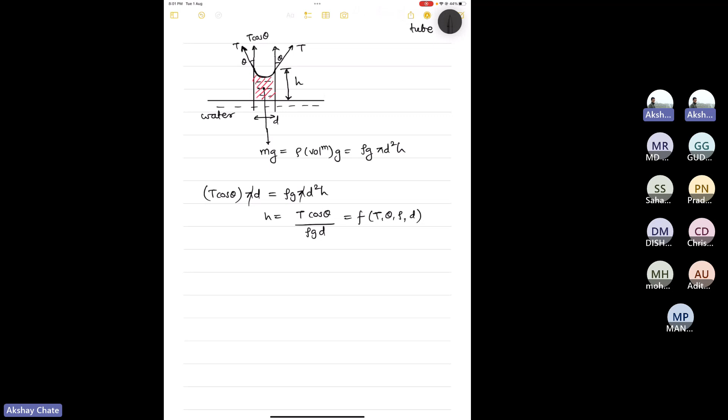What happens in case of capillary fall? It happens when theta value is greater than 90 degrees. So when theta is greater than 90 degrees, cos theta is negative. So how is this less than 90 degree theta in the above diagram? Okay, one second, negative, and that happens.

If you just look at this surface, it is like this. This is the vertical wall. The tangent to the surface is like this. It can be drawn both ways, so it is like this, okay.

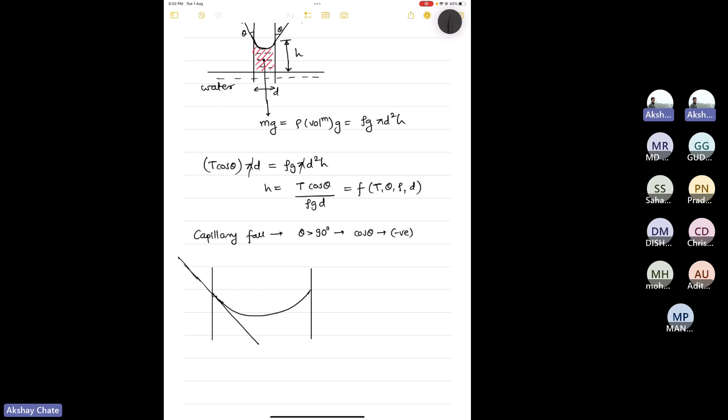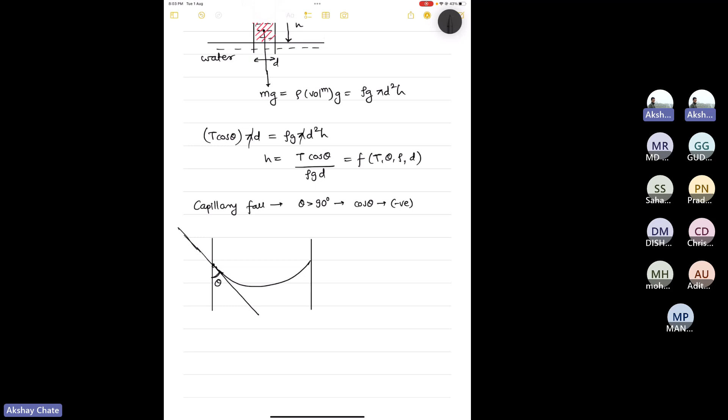This angle of contact, as I said earlier, is always measured in the liquid. So one way to measure it is from the tangent you start and go this way, that will be your theta. Another way is the reverse, but in reverse you're not going through the liquid. Liquid is here, so this is your theta, and from the geometry of the figure, this also becomes theta. Understood? Yes, so that is how it is theta.

In the other case, where the liquid interface bulges at the top, which happens in case of mercury, and here will be the liquid, if you draw the tangent to the surface, it looks like this.

Now you have to define the angle of contact passing through the liquid, so it will be this angle, which is greater than 90 degrees. Therefore cos theta becomes negative, and your h becomes negative. So instead of capillary rise, you get capillary fall.

All yes, okay, got it, sir.

I think based on this discussion, you will be able to solve your assignment questions. My apologies because this discussion was not in a structured manner, as there were many concepts with no common link between them.

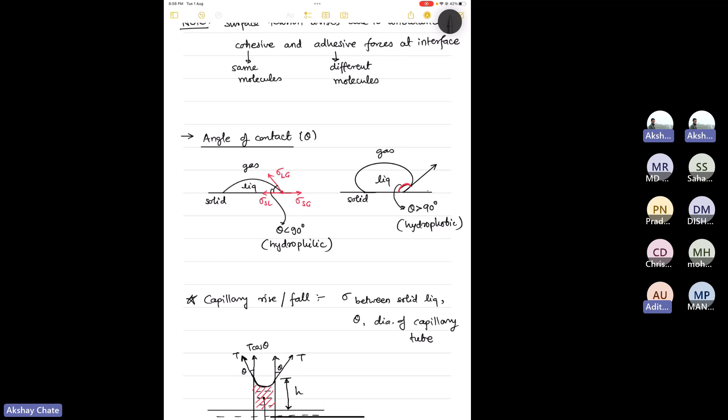Okay, I think Aditya and Pradeep are waiting. So Aditya, maybe you can go ahead. Sir, I was asking, I joined this meeting at 7 p.m. because I had another class from 6 p.m. to 7 p.m. Is that going to affect my attendance or my performance in the certificate?

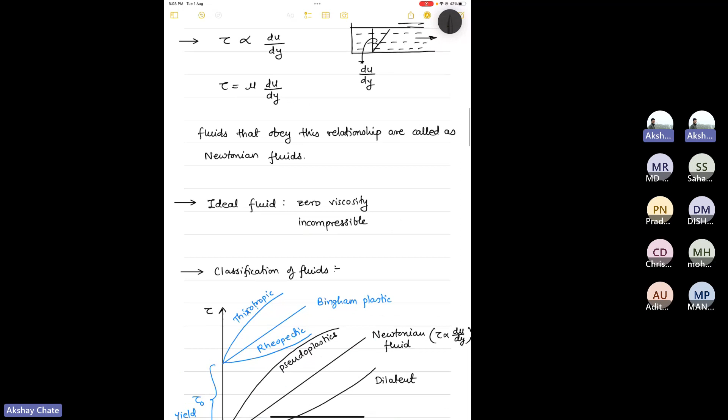Not really, but you have a couple of courses at the same time you're saying? Yes, from 6 p.m. to 7 p.m. I had another class and I joined this class at 7 p.m. Oh, but this will happen every week, right? I think every Tuesday. Oh, see, from my side there is no problem in your attendance and all, but then you will miss the first half of our discussion, right?

I don't think it will affect anything in attendance at all. So can I cover up the concept that I have missed in lecture, can I cover it, those things? Yeah, you can watch this recorded session later, maybe on YouTube. It will be there, and from there you can cover up the first hour that you miss.

You are going to cover the concept that has been discussed in the lecture only, right, not outside the lecture? In some cases, yes, but mostly it will be whatever was taught in the lectures. But sometimes some additional tips are there, so I will try to add them in my discussions. But yeah, mostly it will be according to the content of the lectures for that week. So I can do the assignment and give the exam from the lecture part only, so there is nothing taught outside the lecture that will come in the exam? I don't think so. Okay.